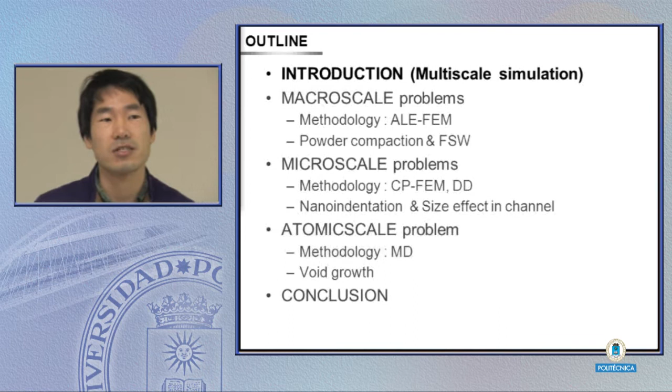Regarding the multiscale simulation method and their application, this presentation includes the ALE-FEM method, crystal plasticity method, dislocation dynamics, and molecular dynamics. First, I'd like to introduce what multiscale simulation is and its objective, and then I'll show you several problems according to their scales, macro scales and atomic scales.

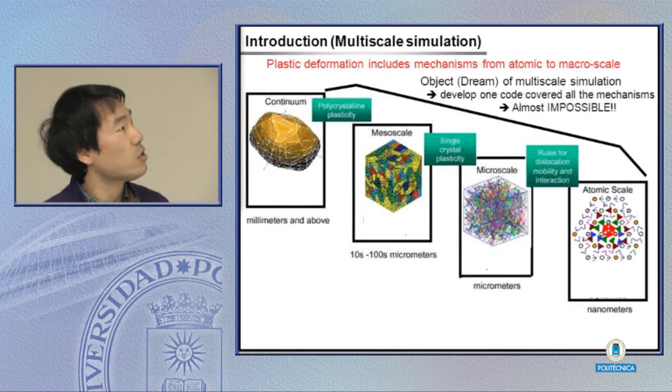Plastic deformation includes many mechanisms from the atomic scale, atom-atom relationships, to the macro scale. As you can see, plastic deformation includes atom-atom relations, dislocation interactions, dislocation-interface interactions, and crystal-crystal interactions. It also includes the global geometry and contact conditions.

So multiscale simulation has an objective, which is developing only one code that includes all the mechanisms in one, and simulates all scales of the problem. However, because the size scale spans about 10 to 13, 10 to 14 orders of magnitude, this is almost impossible.

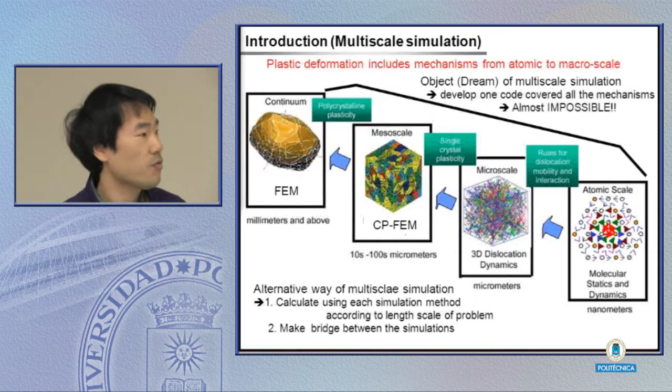So the next alternative way is to use simulation methods which cover each size scale, from molecular dynamics to FEM, and then make a bridge between the simulation methods. That is what I'm doing, and what I want to show you.

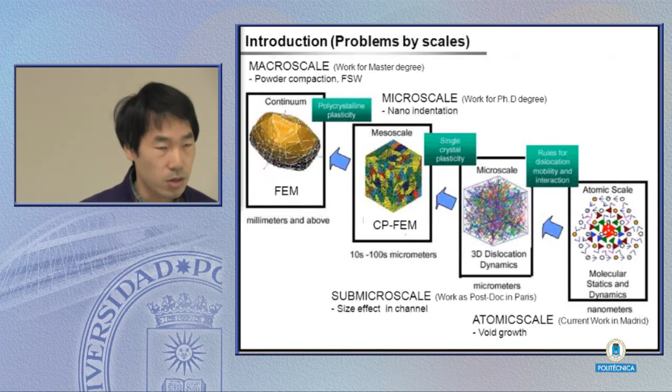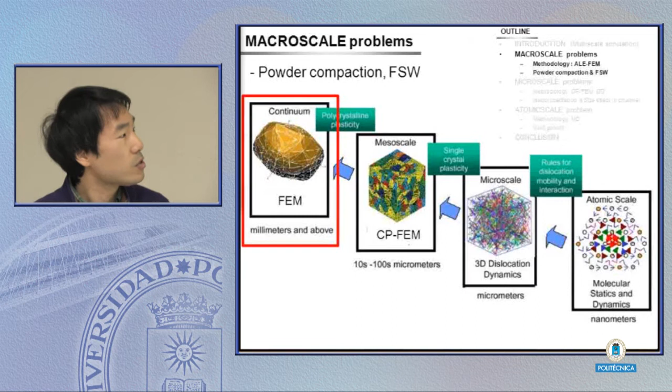Fortunately and coincidentally, I have experienced all the simulation methods, from my master's degree until now. So I can show you the simulation methods at each scale, and their application for those simulation scales.

Let's begin with the macro-scale simulation, which is about the FEM method and its applications.

Usually the FEM method uses the Lagrangian method, where the meshes confine the material deformation directly. So each element of the mesh simulates the deformation of material at that point. If the material deforms very severely and locally, the mesh deforms a lot and becomes distorted, and then it can't continue the simulation.

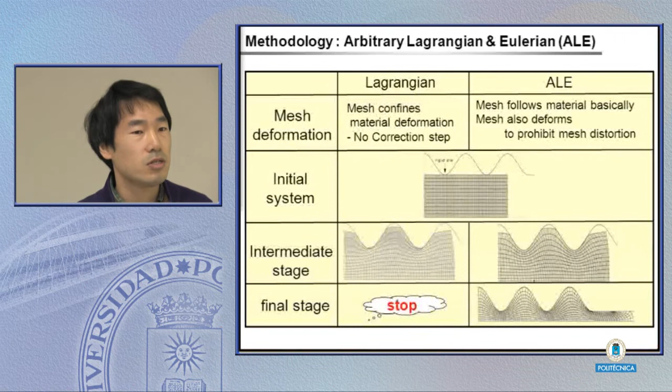On the other hand, with the ALE simulation, the mesh also follows the material behavior like the Lagrangian method. However, it also has a correction step which prohibits mesh distortion like this. So it can simulate even when the material has locally severe deformation like this, and it gives a result.

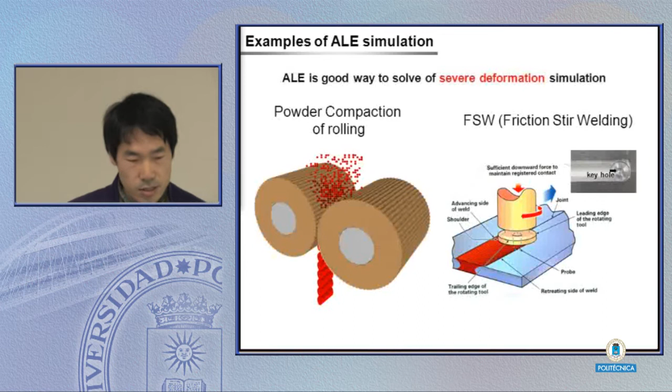I can show you two kinds of applications using ALE simulation: powder compaction rolling, and FSW, friction stir welding. Both cases have very severe deformation, even locally and globally, so it cannot be simulated using the usual FEM method. But with ALE, yes, it can be simulated.

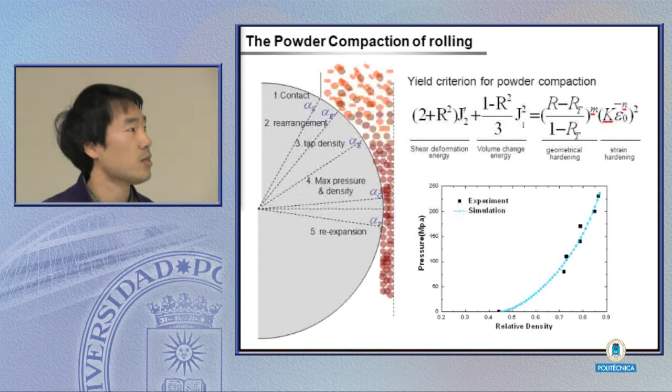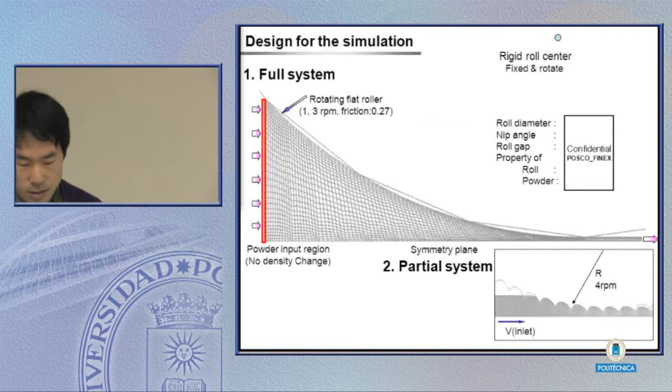First, I can show you the powder compaction rolling. When the powder contacts the roller, the voids inside the particles can be reduced due to rearrangement. As soon as the powder density reaches the critical density, the powders start to deform plastically. As soon as it passes through the roller gap, it re-expands a bit due to elastic deformation. All of this procedure can be simulated using this kind of criteria with three unknown parameters.

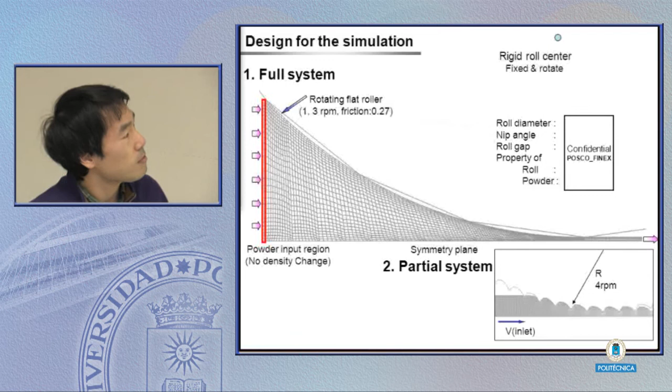The parameters can be obtained from experimental data, like this. Here's the mesh design for simulating the powder compaction. Although I can't tell you the exact quantities due to confidentiality, I can show you that the inlet powder length is much higher than the outlet length, which represents a very severe deformation simulation.

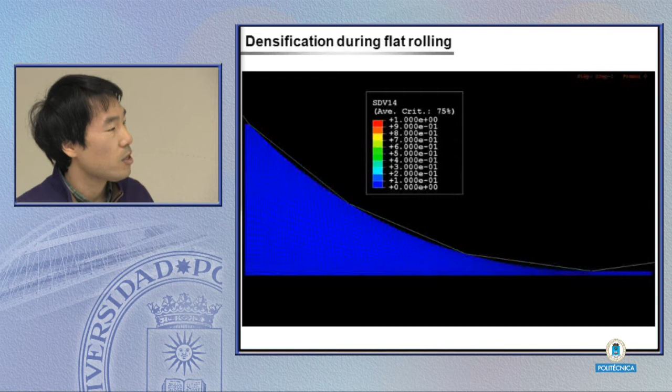But with ALE, we can do the simulation. And to see the roll surface pattern effect, I simulated focusing only on the surface roll gap part.

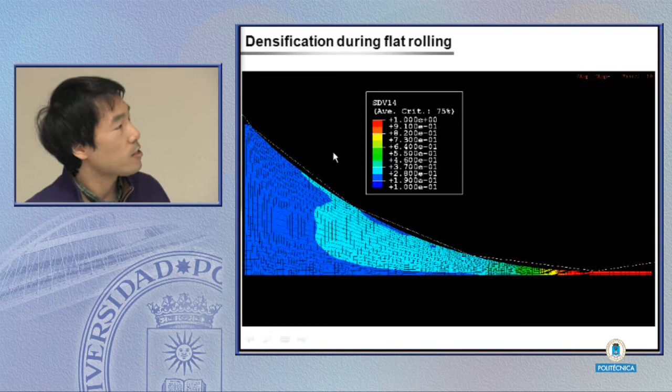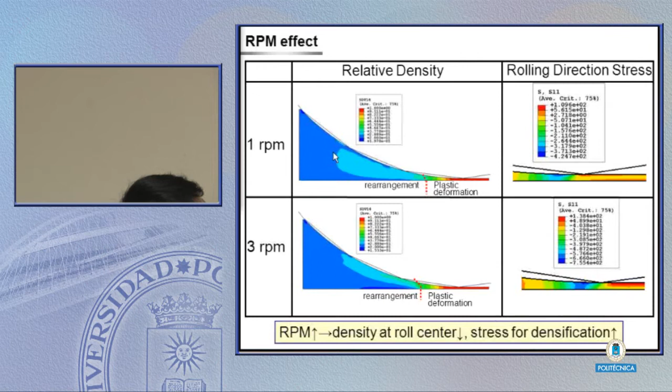So here's the result of densification during the rolling. At the beginning, it begins with very low density, but during the powder compression, you can see the powders begin with very low density, but become compacted after the compression.

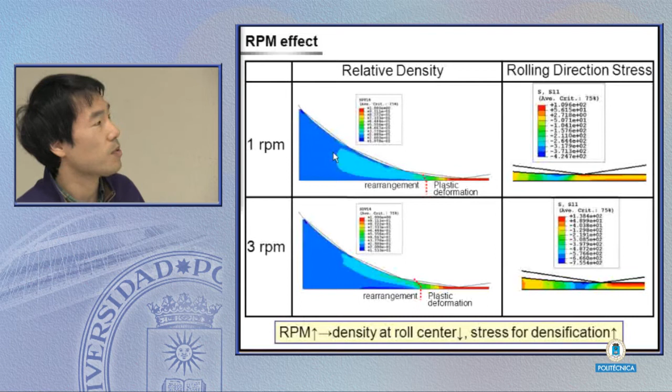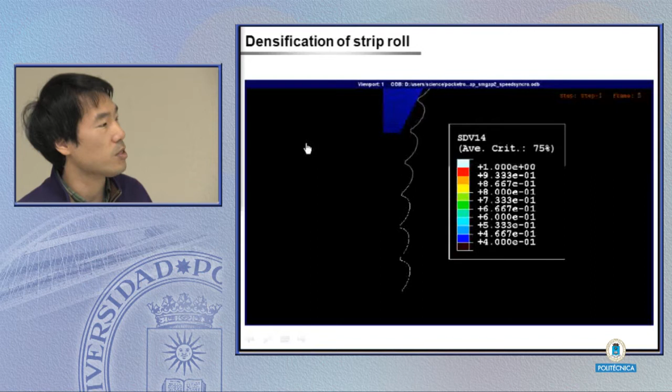So here is the major result of this simulation. With low RPM, low speed rolling compression, all the powders inside the roller can be compacted nice and smoothly. However, with higher speed of rolling, only the powders near the rollers are compacted, giving huge residual stresses.

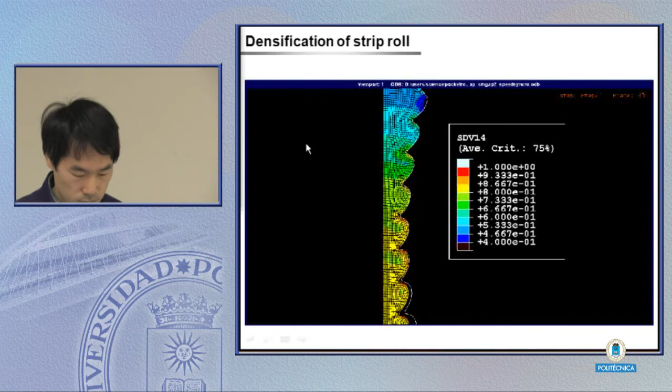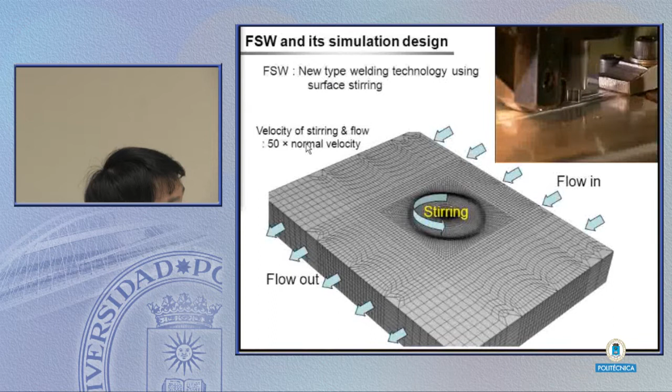So with high speed rolling compression, you will produce very unstable compacted powder. Now I show you the effect of the roll factor. As you can see, here is the huge compacted zone and here is not.

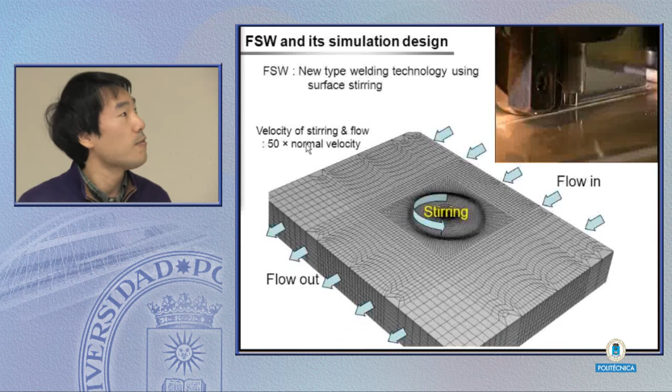The next example is FSW, friction stir welding. Friction stir welding is a new type of welding method using the stirring of the material. It gives locally very severe deformation near the boundary, so it's also very hard to simulate. But with this mesh design and the ALE method, we can do FSW simulation.

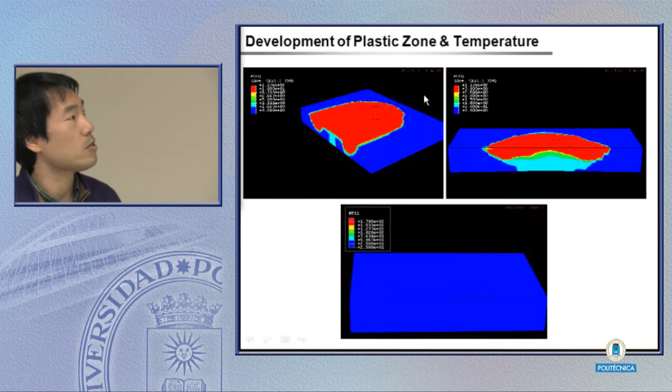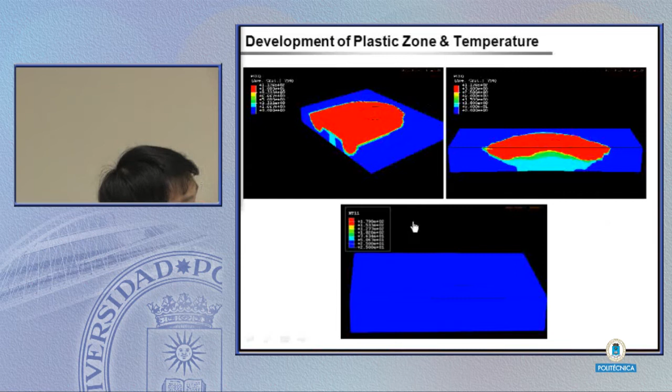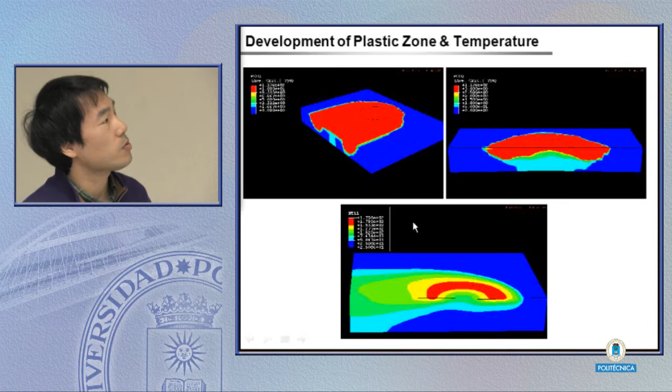The first feature is the plastic deformed zone cases. As you can see, with the stirring of this joint, it develops the plastic deformed zone. You may not see the vector value at the highest plastic strain case—it's over 100, so it's too severe a deformation.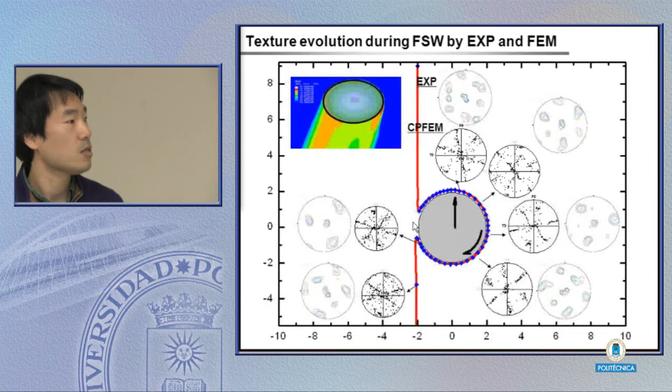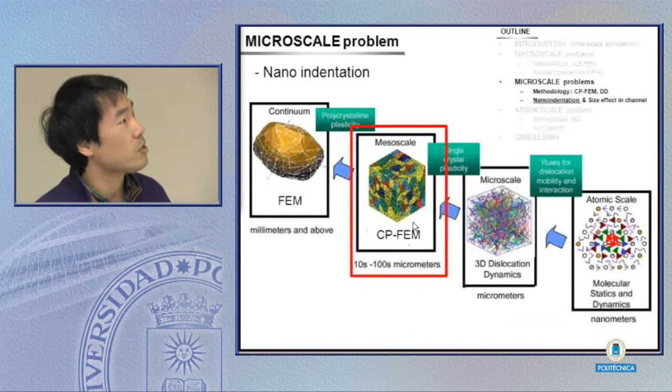And we can see the temperature heat flow during the FSW simulation and FSW experiment. The heating is due to friction, and then it flows like this. Also, we can follow the material flow during the FSW, and we simulate the texture evolution, which is confirmed by the experiment.

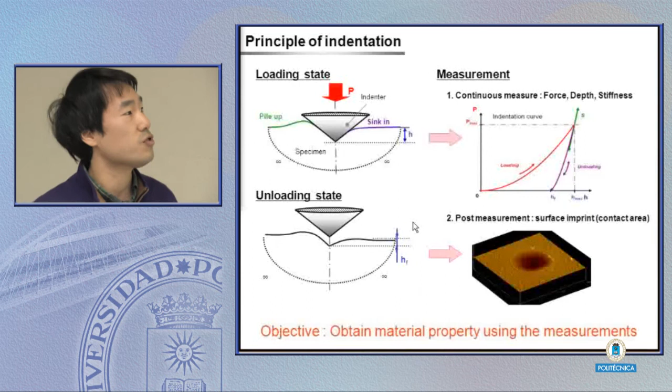Now let's scale down to the microscale simulation, such as nano-indentation. The objective of nano-indentation is to get material properties using the load displacement curve and surface imprint. This nano-indentation procedure can be simulated by FEM simulation or crystal plasticity, and this kind of simulation supports and confirms the experimental result.

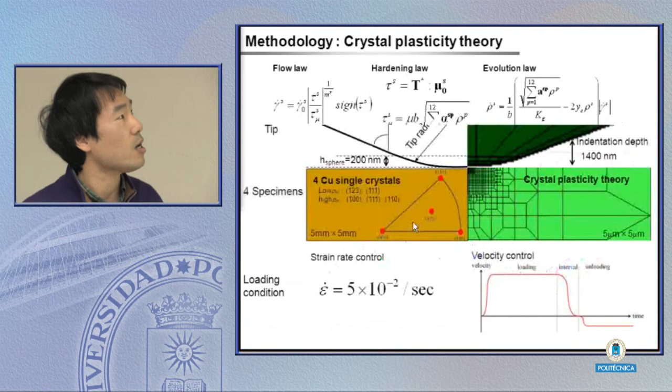I will briefly show you what crystal plasticity is. Crystal plasticity explains plastic deformation using the activation of the slip system inside the crystals. Using this, it uses several equations for the flow law, hardening law, and evolution law, and it also needs some parameters to explain the hardening and dislocation evolution.

Using these equations and parameters, we can simulate the load displacement curve according to the loading direction and orientation changes.

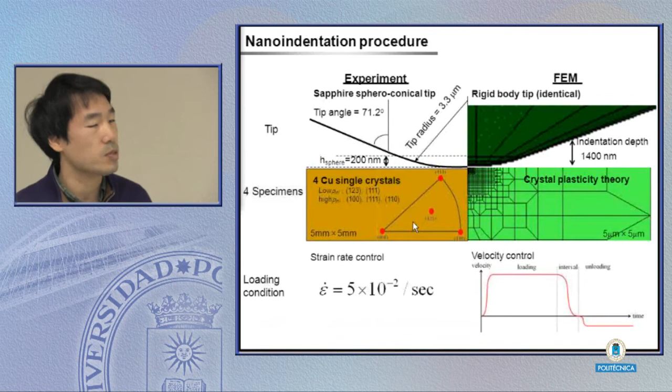We do a simulation using the crystal plasticity code just like the nano-indentation experiment, both experimentally and computationally. In the experimental part, we do conical tip indentation, using 4 types of specimens with 4 different surface orientations and 2 different initial dislocation densities.

With the FEM part, we do the same exact quantity as the experimental test and simulate. We compare the results for the experimental and FEM result.

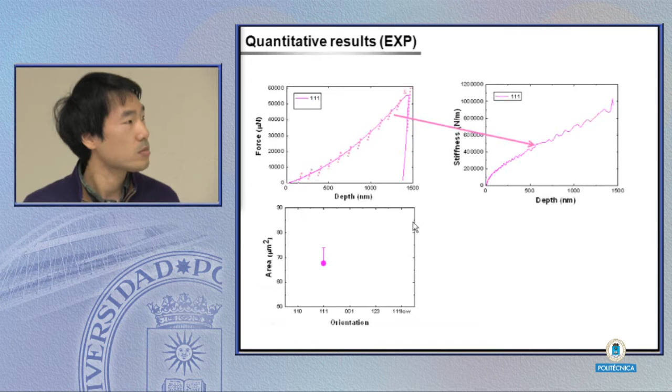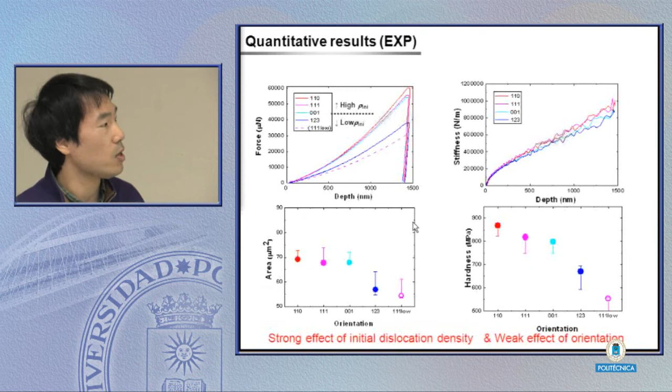Using this nano-indentation test, we can have the load displacement curve, and from the slope of the unloading curve, we can have stiffness data. We also obtain the contact surface area using the AFM test, and using both the load displacement curve and the area data, we can have the hardness data.

We do the same procedure for specimens with 4 different orientations and 2 different initial dislocation densities. As you can see, the load displacement curve and all the other quantities totally depend on the initial dislocation density.

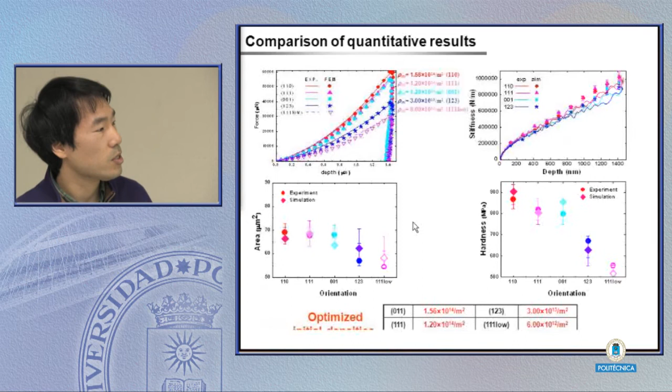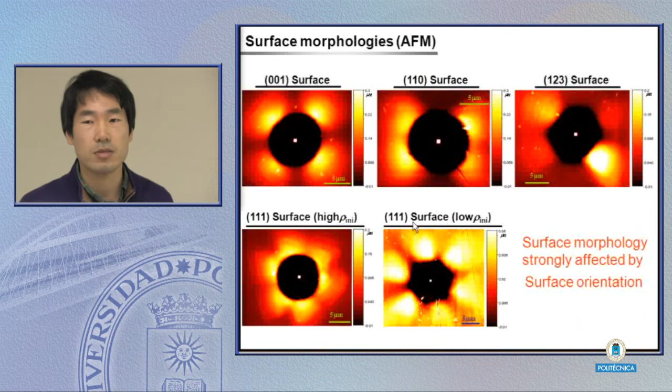And we see the orientation effect like this. This experimental result can be reproduced by the FEM calculation using only the different initial dislocation density. So we do exactly the same simulation, same data as the experiment.

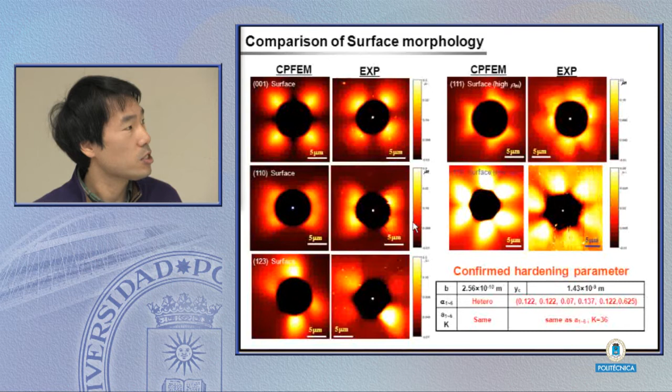The next one is the surface imprint using the AFM test. In this case, the surface experiment totally depends on its surface orientation, and this surface imprint is also reproduced by the FEM simulation like this. So both qualitatively and quantitatively, it's a very good measurement compared to the experiment.

For this kind of simulation, we use these hardening parameters, and we do an analytic test using dislocation dynamics too.

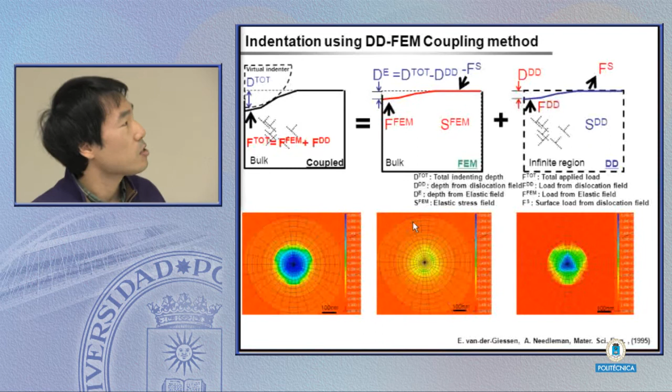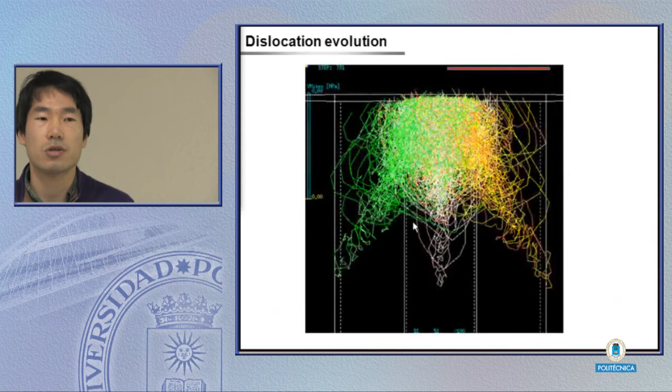And what is dislocation dynamics? There are many ways to simulate dislocation dynamics, but in my case, the dislocation lines are discretized by edge and screw dislocations, and each segment can be moved due to applied stress and internal stresses. The dislocation simulation also includes local dislocation interactions such as annihilation, recombination, junction, and cross-slip, and it also simulates dislocation interface interactions using facet algorithms.

Dislocation loops are generated by the contact of indenters. The size of dislocation loops is totally dependent on the contact surface. So with different indenting, the size of generated loops is increasing.

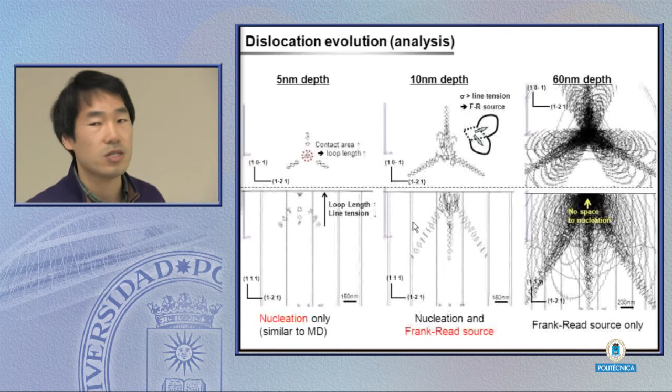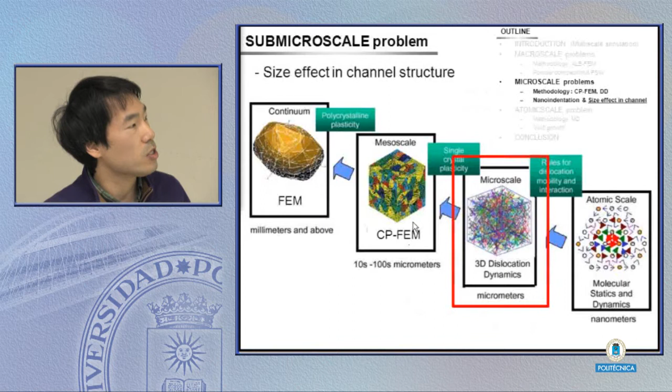When the generated dislocation loop is large enough to act as the Frank-Read source, dislocation can be generated both from the nucleation beneath the indenter and the generation by the Frank-Read sources. As soon as the dislocation density is too much to nucleate beneath the indenter, in that case the dislocation is generated only by the Frank-Read sources.

The next step is we can focus on only the size effect inside the channel and so on. The size effect is usually explained by the dislocation structure.

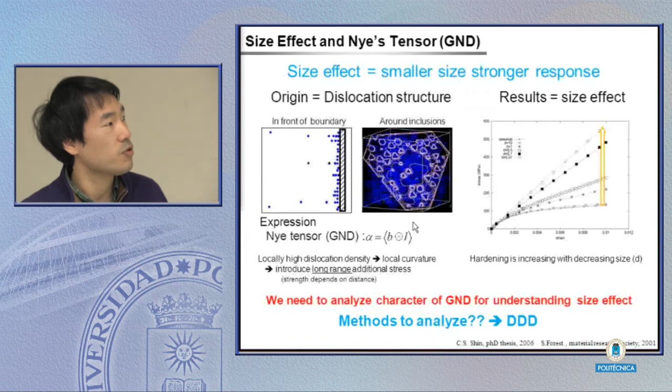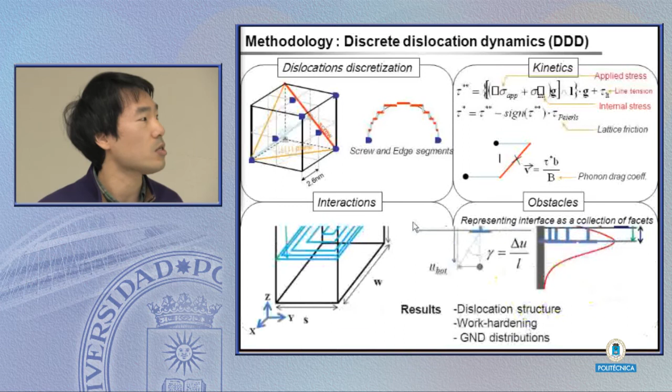As soon as the dislocation is concentrated locally due to the inclusion or the boundaries, it makes a huge long-range interaction stress, and we have the size effect. The smaller makes it stronger. To make a different analysis between these two results, we need to describe this dislocation structure in mathematical variables, such as the Nye tensor or geometrically necessary dislocations.

And we need a simulation tool which can reproduce the size effect, such as dislocation dynamics. So we will use dislocation dynamics to analyze the size effect, with the same method as dislocation dynamics as I explained.

And this is the test condition to see a size effect. The dislocation is evolved at each slip plane inside the isolated crystal. Here we have two different sizes.

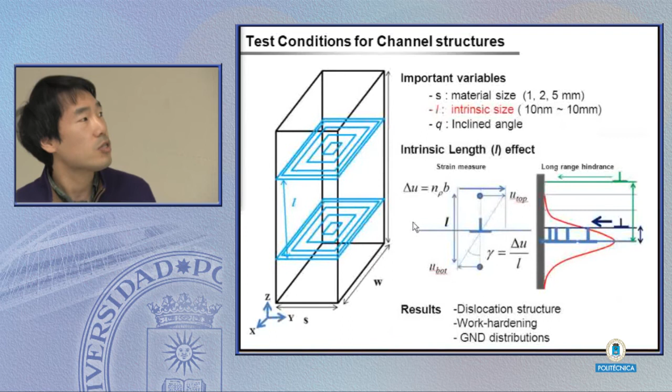One is the size of the channel, which is the width, representing the material size, and the other is the distance between slip planes, representing the intrinsic size. The intrinsic size is very important because of two reasons.

One is it makes the strain measured directly, and it also affects the long range hindrance like this.

And then using this simulation situation, we will have the dislocation structures, work hardening, and GND distribution.

Before showing you the dislocation dynamics result, I'd like to introduce some of the analytical solutions for these systems. At first, the Mura solution gives the analytical solution for this kind of multi-slip pile-up case. However, in this case, there is no consideration of the interaction between the slips.

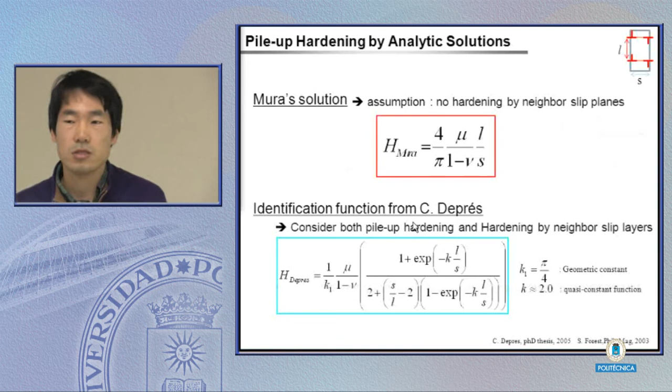So, on the other hand, C. Deprés suggests some alternative analytic solution, which includes both the pile-up and the one slip plane and the interaction between the slip planes.

So I'd like to show you the result of the analytic solutions, which will conform with the dislocation dynamics and support the analysis in the dislocation dynamics result.

The dislocation dynamics give the dislocation structures, such as the pile-up structure increasing due to the strain, and then it also gives the load displacement curves.

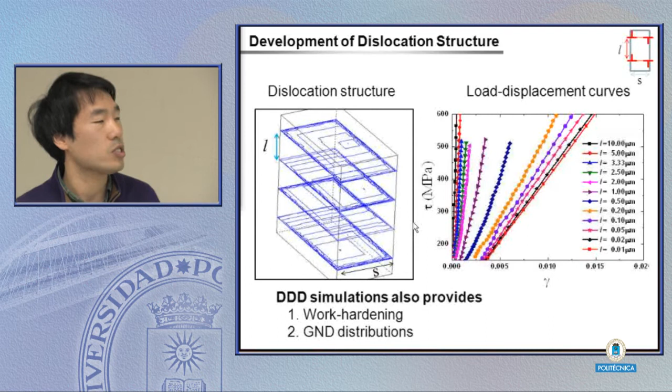The load displacement curve is totally affected by the internal length scale. Decreasing the internal length gives more strain with a given stress field.

So using this raw data, we can get the work hardening from the slope of the load displacement curve, and the GND distribution from the dislocation structures.

At first, here is the work hardening result. As you can see, the work hardening totally depends on the ratio between the two length scales, the material scale size and internal size. And there are two regions.

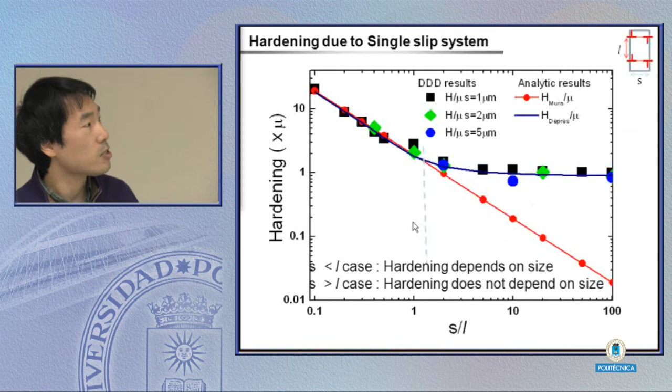At the first region, both the dislocation dynamics and the Mura solution and the Deprés solution give the size effect. The smaller makes it stronger.

On the other hand, in the other region, both the Deprés solution and dislocation dynamics give stable hardening, but the Mura solution doesn't match the dislocation dynamics result.

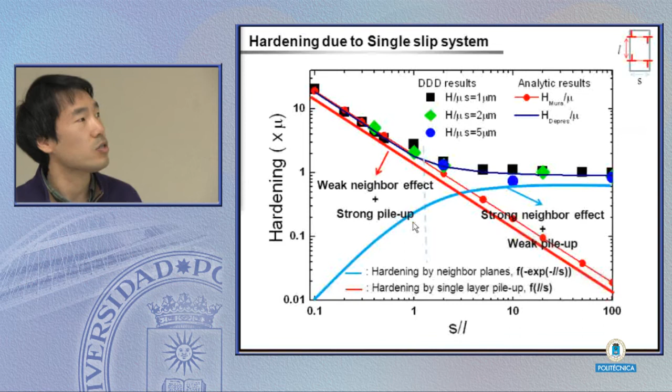The reason is there are two kinds of hardening mechanisms. When the distance between two slip planes is large enough not to interact with each other, the hardening is only due to the pile-up in one slip plane.

On the other hand, decreasing the length between two slip planes, the interaction between the slip planes also contributes to the work hardening. So this is the reason why the Mura solution doesn't give the same dislocation dynamics result. The Mura solution doesn't consider the interaction between two layers.

And we can show you the GND distribution inside the crystal. Here it also totally depends on the ratio between the two length scales. When the ratio is smaller than 1, this is the size effect zone, in this case.

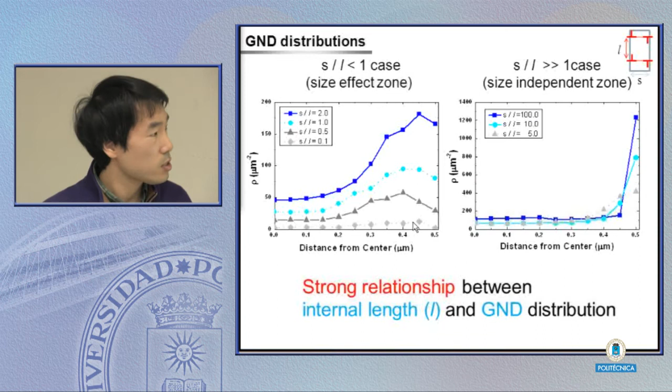In this case, the GND density is minimum at the center and maximum at the boundary, and it increases gradually. However, when the ratio is very big, as in the non-size-effect zone, the distribution is only accumulated at the boundary, not in the bulk crystal.

You can explain this result using only one assumption: dislocation pile up only happens when the slip planes at the boundary are filled with dislocations. The reason is that dislocation pile up always needs higher energy than dislocation filling the empty spaces.

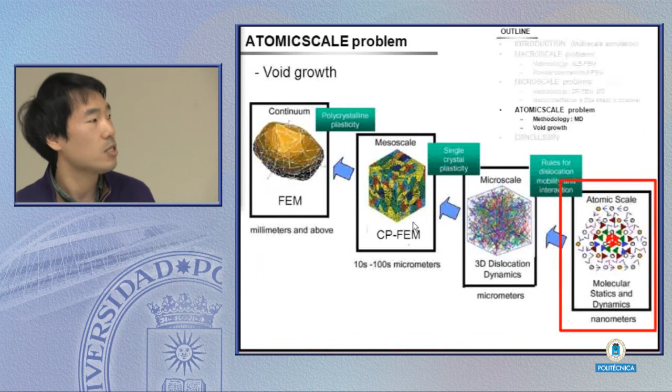When the ratio is very small, it means there are few sites at the boundary, so dislocation easily fills all the sites at the boundary and starts to pile up from the beginning. On the other hand, when the ratio is very big, it means there's infinite space at the boundaries, so dislocation always fills the empty space, not making a pile up.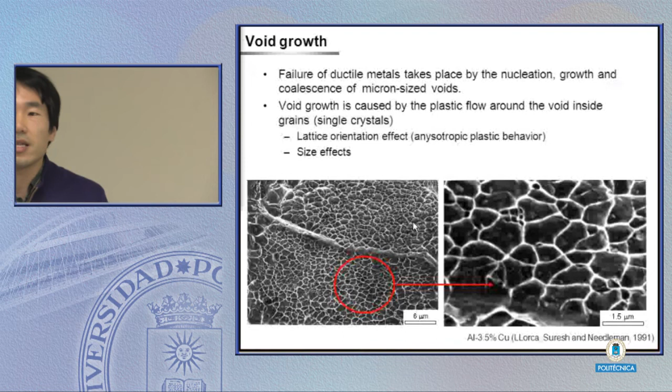The last thing I'd like to show you is what I'm doing now at the atomic scale, which is about void growth. Void growth is very important because it affects ductile fracture, like void growth and coalescence of voids. Also, around the voids there is specific plastic flow, which gives a size effect due to the size of the void and so on.

So we do a simulation using molecular dynamics and dislocation dynamics to see the size effect of the void and the plastic flow around the voids like this.

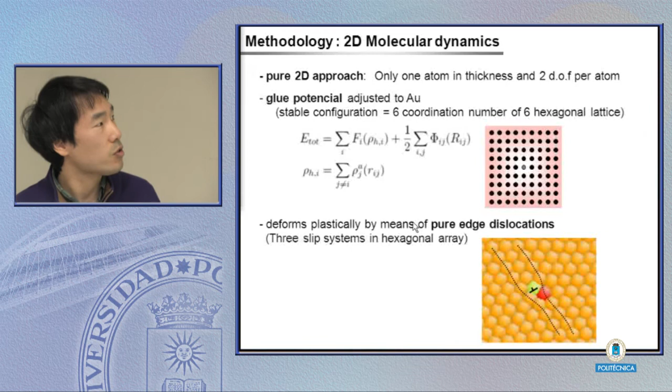We do the molecular dynamics and focus on two-dimensional systems. We introduce some adjusted glue potential with hexagonal lattice.

This molecular dynamics may automatically generate a dislocation like this, and the generation and movement of the dislocation makes the plastic deformation.

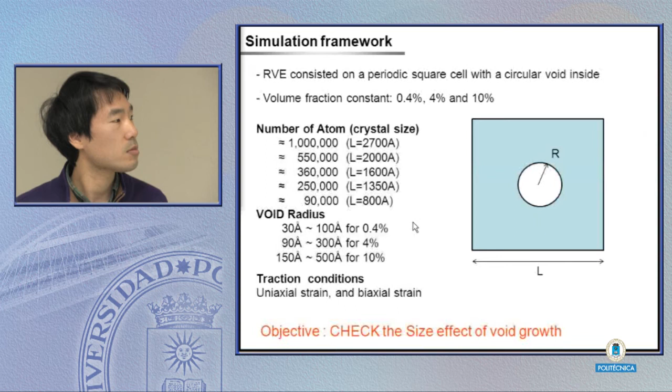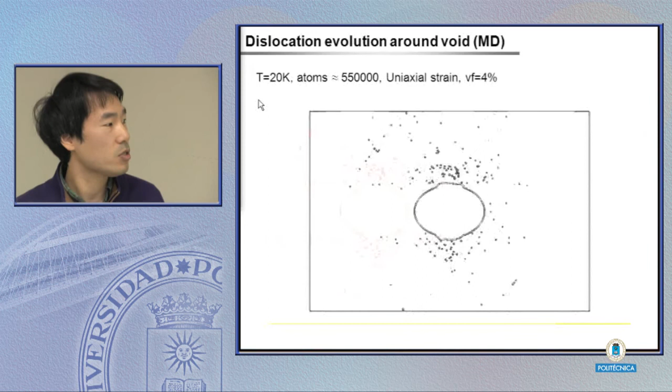Here is the system we are working with in the molecular dynamics. We have the crystal, which has several sizes, and the voids, and the void size is controlled by the volume fractions. Using this simulation, we check the size effect of void growth and the dislocation evolution around the voids.

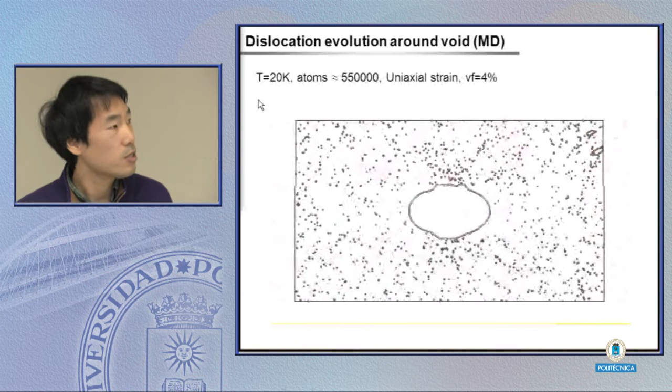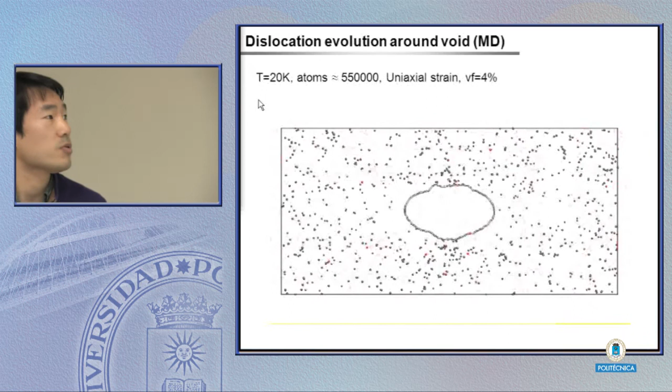The voids are crossed by the dislocation and the stress field, and we see the void grows.

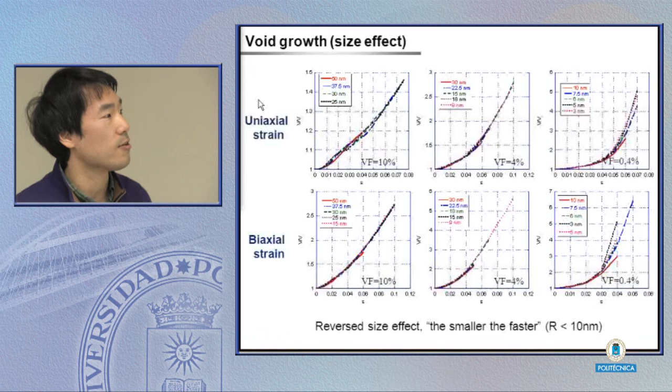As you can see, usually the molecular dynamics gives no size effect, except for very small void sizes. When the void radius is less than 10 nanometers, it gives a size effect, but it's a reversed one: the smallest void means faster void growth, which means much less hardening kind of thing.

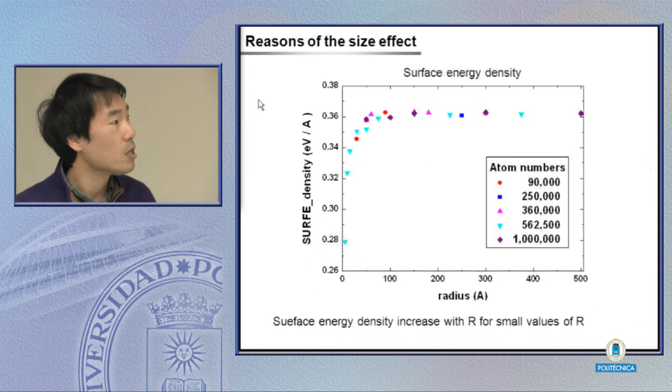The reason is the surface energies. As you can see, the surface energy is very low at the smaller void, and it increases very fast until the void is about 100 angstroms, then it stays constant with void radius. The smaller surface energy means that when the void is increasing, it needs much smaller surface energy to make the increased surface, so it helps faster void growth. The lower surface energy helps faster surface void growth.

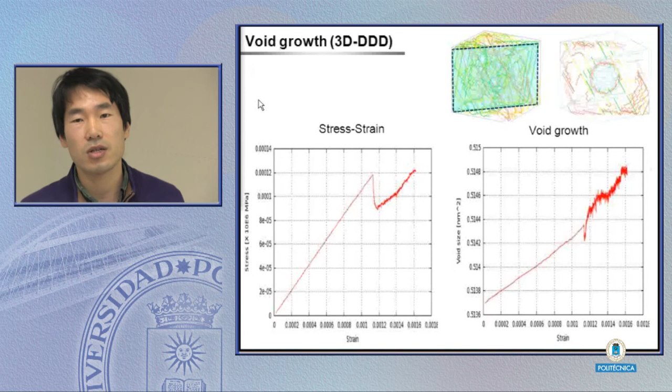I'd like to show you the result from this morning. I do the same procedure with the void growth, like the molecular dynamics, using dislocation dynamics. This gives stress-strain curves and void growth, just like the molecular dynamics, and then we can see the void growth system.

For future work, I'll do the same procedure with different sizes, like the molecular dynamics, and then we can plot the void growth with the sizes and compare it with the molecular dynamics and experiment, like this.

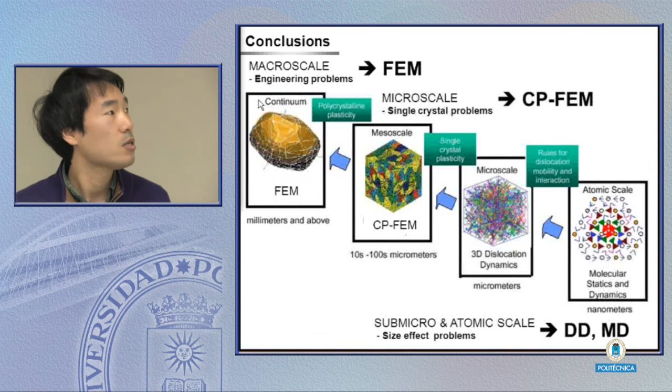For the conclusion, we have many kinds of simulation methods which cover each problem scale. Each simulation method has its own strong point, such as FEM being good for engineering scale problems, and molecular dynamics and dislocation dynamics being good for scientific problems, such as size effect. So although multi-scale simulation is not enough to cover all the scale of problems, we can choose the simulation method according to the problem size.

Yeah, thank you for your attention.

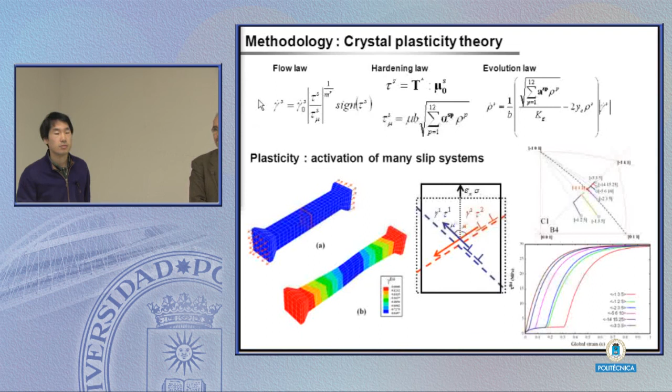Is there one density of dislocation for each of the 12 systems? Yes, different variables. Do you consider only one density independent of edge or screw dislocations? You have a unique density? Unique density, there's no distinction between edge and screw.